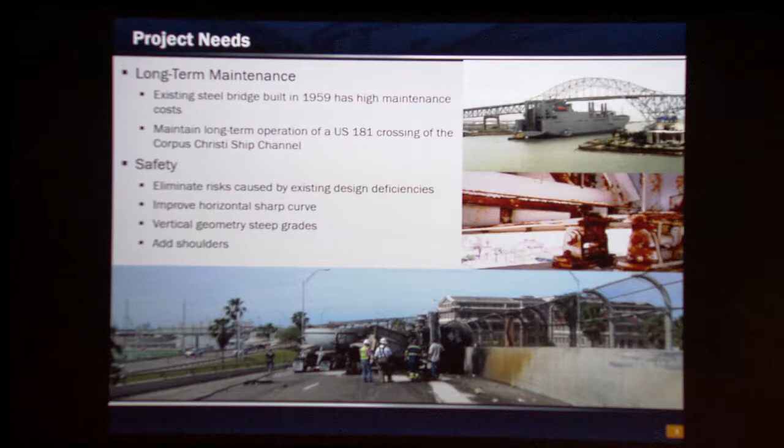Here is a picture of our existing bridge, and as you can see, it really makes the skyline of Corpus Christi. It's really an icon of the community. It appears on the city seal, it's on business cards, in restaurants, things like that. So our goal was, how do we recreate that? How do we get the community buy-in? How do we maintain and enhance the connectivity that the current bridge offered to the community?

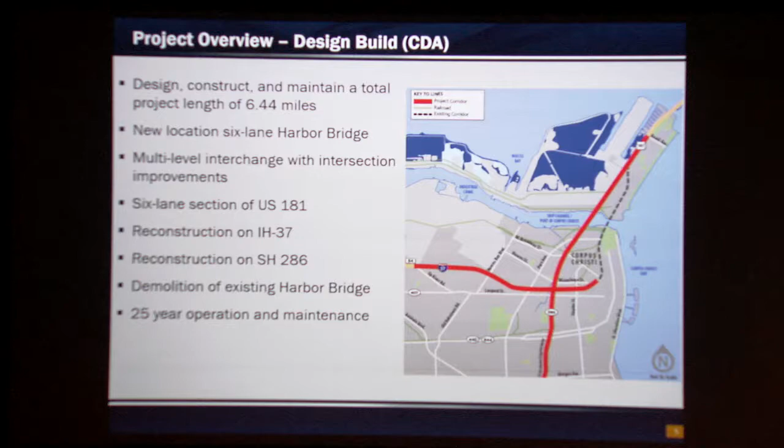Here's our scope. It is a design-build project with a 25-year O&M maintenance, so it's really a comprehensive development agreement, a CDA, and it's not really just a bridge. We're also rebuilding a major interchange. The interchange and conventional road work makes up 52% of the project, so the majority of the project really isn't just the bridge, that's just the pretty part we like to talk about. And then, of course, improve safety.

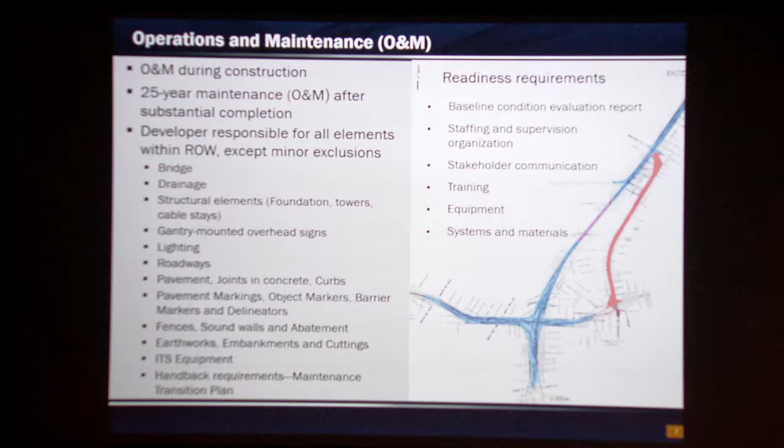The developer is currently taking over operation and maintenance of the corridor, which helps free up some of our maintenance guys, and they're really happy we've done that. DBI is the subcontractor that has taken over the corridor, and they've done a really good job, we're really happy with what they've done. There's a 25-year operation and maintenance period after construction. They'll be responsible for everything listed there. There will be performance criteria, and handback requirements, and somebody will probably talk to you about those in 2046. Hopefully it won't be me.

TxDOT can't deliver a project like this on our own. Our partner in this endeavor is Flatiron Dragados, composed of Flatiron Constructors and Dragados USA. The main bridge engineer is FIGG Bridge Engineers. They bring a lot of innovation and a lot of energy to the project, so we're really excited to have them on board.

So where are we? The RFQ was issued back in 2014. The CDA was executed in late 2015, and we are in construction now. We are still on schedule to deliver the project, with opening of the new bridge in 2020, demolition of the old bridge in 2021, and then living through the O&M period through 2046.

So how is the project managed? We are managed out of the district office. Chris Caron is our district engineer; he is our alternative delivery manager. Valente Olivarez is our deputy district engineer, but he also serves as the project manager on the project. I'm the deputy project manager. And then we have Christopher Amy, who is our environmental manager. He manages the day-to-day engineering and environmental aspects of the project.

He's also responsible for helping the developer get through any reevaluations that may be necessary. He also manages, as some of you may be aware, a voluntary relocation program that's part of this project, running in parallel with the construction project, but not part of it. So Chris manages that for us as well, and it's really voluntary. We've got two communities adjacent to the project, and we are helping them move out of the area if they volunteer to do so.

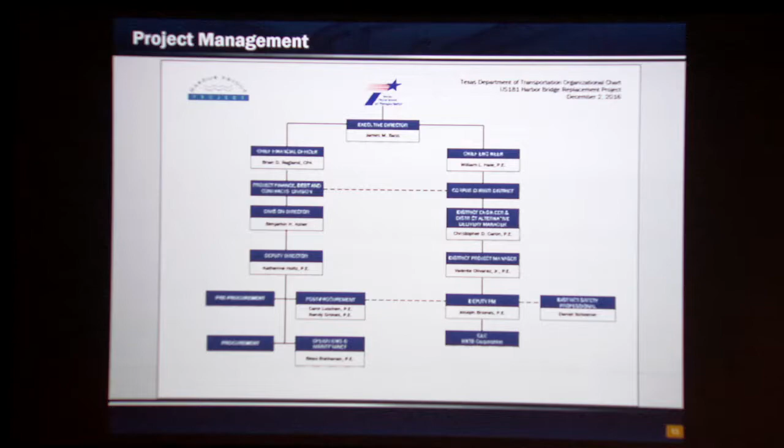I also want to say that the divisions really help us out. They act as SMEs for us, subject matter experts. They help us with our reviews and really do a good job of offering the district a lot of support. For day-to-day operations, we have a GEC, a general engineering consultant, that's HNTB, and they're down there with us every day working through the project as well.

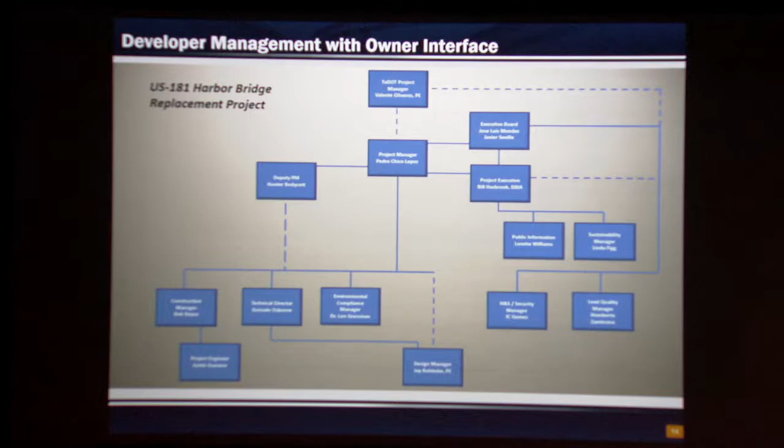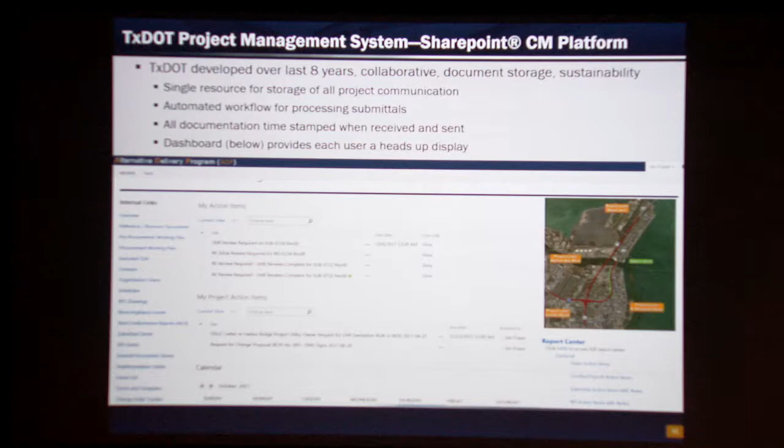One thing you can be sure of with any mega project is mega paperwork, so we use SharePoint to manage that. SharePoint is our central document control center. It handles design submittals, it handles all other kinds of submittals such as insurance and DBE things. It assigns workflows and reviews, it sets deadlines, and it's the official document control of the project.

The developer uses Aconex, and Aconex then uploads to SharePoint. This is their internal structure. For our field guys, we have the software called FieldWire. FieldWire has all the construction documents and real-time access for field personnel, so when they go to the work site, they can look at a footing and be sure they're looking at the right document and the latest construction documents.

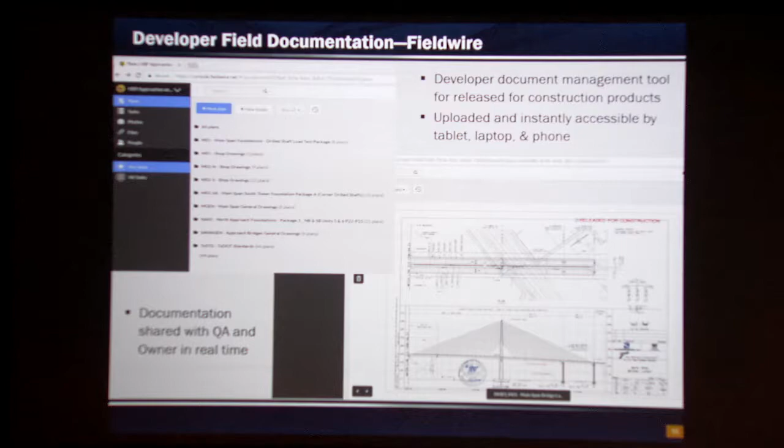So let's get into the contract a little bit and talk about some tools we have. We've talked about this in the past: non-compliance events. It's a unique tool that we have. The Harbor Bridge project is the first to use it in construction. It's really an administrative tool to achieve contract compliance, and we use it for all the small things that may or may not be as important to the developer as they are to us, such as DBE paperwork and insurance paperwork.

What it is, we assess points based on non-compliance, and the points add up. Each point is worth $6,000. Once they accrue to 10 points, they're assessed on the next draw or estimate, and they get hit with a $60,000 kind of LD. I do want to say we do not use it as punishment for the developers at all. The PM has ultimate discretion on how the tool is utilized, but we've had really good success getting a lot of paperwork stuff cleaned up utilizing this tool.

We participate in a lot of over-the-shoulder workshops and meetings with the developer, where we sit with them face-to-face. We put everything out on the table, and we try to get design submittals substantially complete and substantially in line with the technical provisions before they're officially submitted, so there's not this iteration back and forth. This really cuts down on the time it takes for a design submittal to be approved, and ultimately will hopefully result in a shorter project duration.

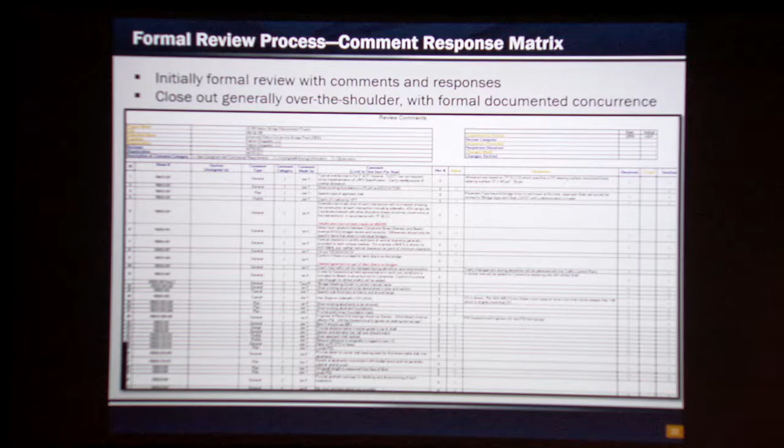Right now, we are averaging 6.6 days on returning a design submittal. Per contract, we're allowed 14 days for that review, so we're about half. Moving forward, through collaboration with the developer, we're looking to reduce that even further.

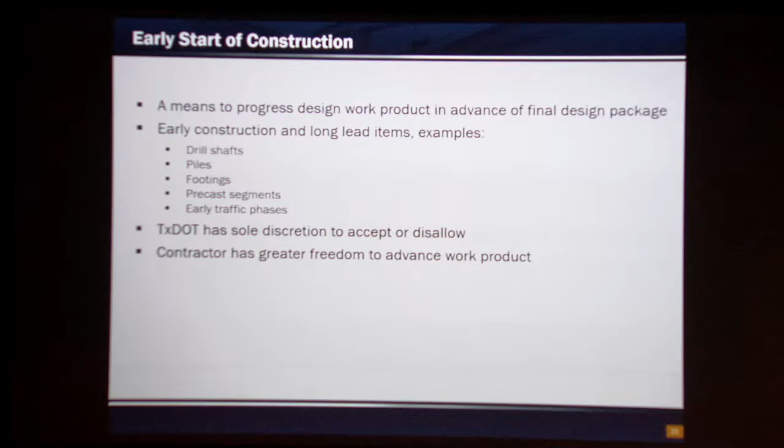So to get to construction, the developer really has two avenues. He's got an early start of construction avenue, which is for early activities, foundation designs, things that we're comfortable with their design assumptions on and that don't have a high risk to get out there and build kind of early. The second mode to get to construction is what we call our certificate of compliance. With a certificate of compliance, we're really comfortable that we have a true complete design, including calculations, right-of-ways cleared, utilities cleared, things like that.

With a certificate of compliance, TxDOT provides a written concurrence that we have looked at the design and we concur that it is substantially ready to go. That doesn't remove any of the risk from the developer. Our risk people are very clear to say that, so I have to say that here. But it does give the developer a little bit more confidence with their designs moving forward.

Another part of this project is public information. We made public information part of the contract, part of the developer's responsibilities. The developer is responsible for interacting with customer groups, media relations, social media, but mainly to maintain and build on TxDOT's reputation in the area. We really pride ourselves on our responsiveness to the public and to the media, and that's something we take big pride in and pay attention to moving forward.

Now some interesting things we like to brag about with our bridge. Our main span spans the entire waterway of the ship channel. It is 1,661 feet long, about 5.5 football fields. Once complete, it will be the longest concrete segmental cable-stayed bridge in North America.

Additionally, our main span towers sky to 528 feet. They are about 125 feet taller than the tallest structure in Corpus Christi, and they will be the tallest structures in Texas south of San Antonio. So those are some things we like to brag about.

Another thing the developer brought to the table with this project is a 170-year design life for the main span structure. It's been really neat trying to design how we're going to protect this bridge for a 170-year design life.

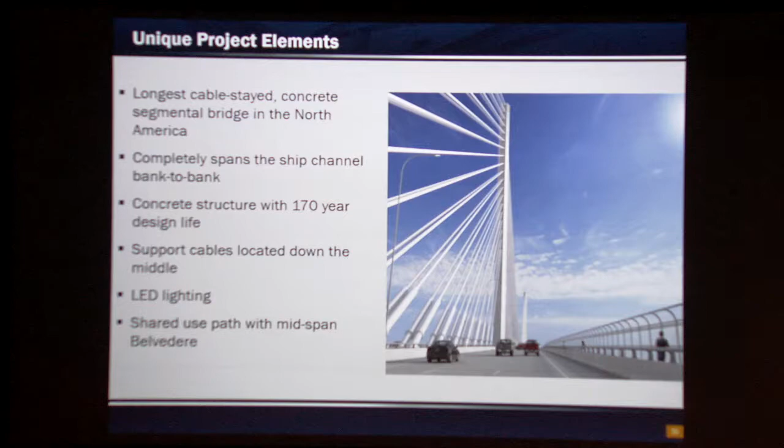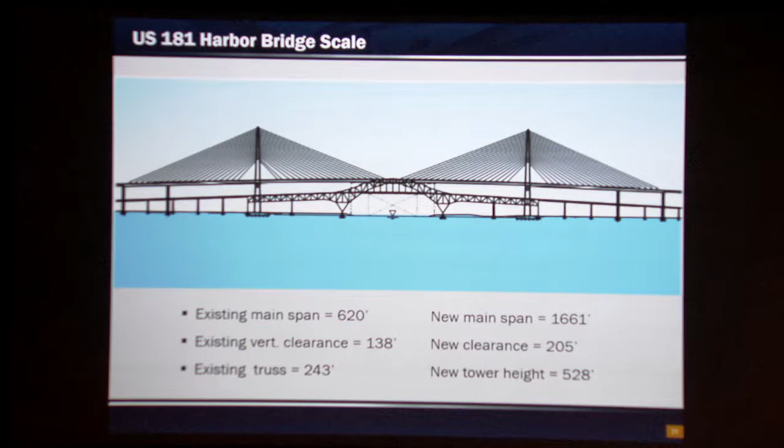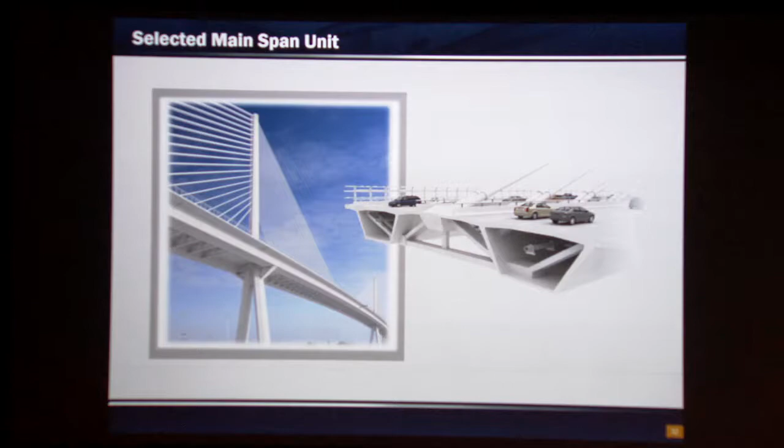Here's just an artist's rendition of our selected main span unit. I mentioned FIGG earlier—they really designed some sleek, elegant bridges here. The cable stays run down the middle. So this gives you an idea of how neat this project is.

Another important thing to Christopher Amy, our environmental manager, is sustainability. How can we reduce our carbon footprint while we move forward with the project? Partnering with Federal Highways, the developer has committed to an Invest Platinum rating during design, construction, operation and maintenance. So we look for any opportunity to be more environmentally friendly and reduce our impact. We'll be monitoring going forward and probably providing updates every year as we move toward achieving the platinum rating.

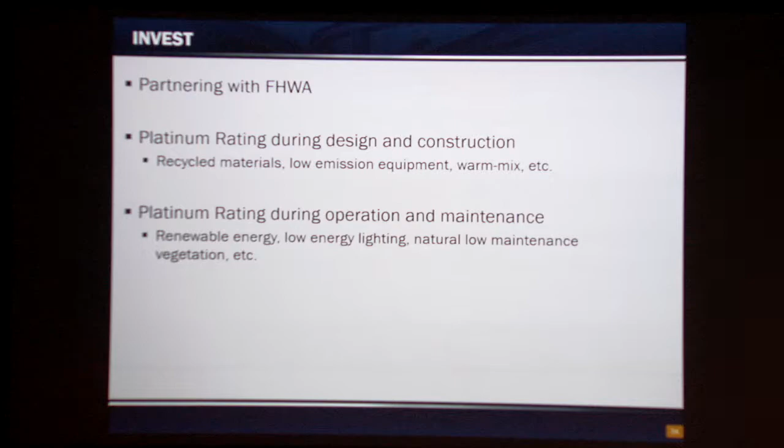As I mentioned earlier, the old bridge is an icon of the community, and the community has a lot of pride in that. So we said we need to involve the community, have them get some ownership and buy-in into the new project. We had two design charrettes where we invited the general public to comment on the aesthetic proposals and landscaping, and really gave them a vote on what they'd like to see. Through those design charrettes, they voted, and we came out with concepts we'll be moving forward with. What we also heard was the importance of connectivity.

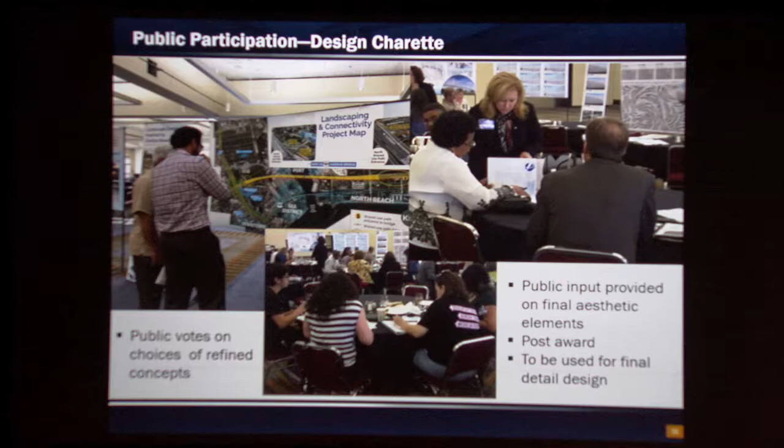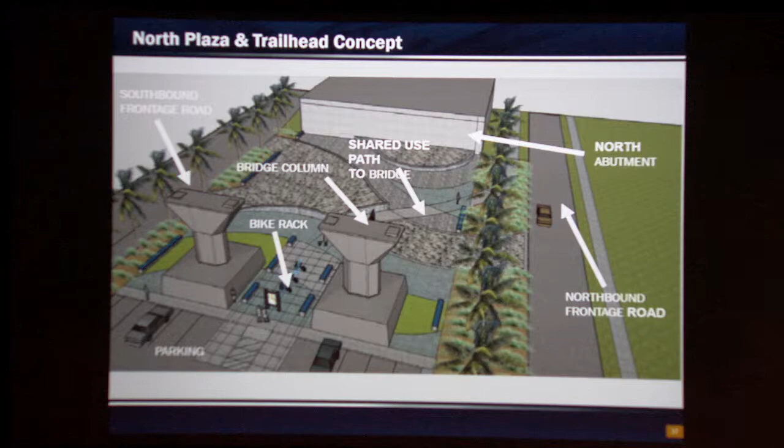How do we connect communities, across the bridge, under the bridge? We have a shared use path that I'll talk about in a second. Out of that came a shared use path across the bridge, and they said we need some connection points at the north and south. Here's a rendering of what we're planning at the north. The bridge is removed so you can see what's underneath. We plan on building a parking lot and an ADA accessible pathway to our shared use path so everyone has a place to access our facility and is encouraged to come look at our bridge.

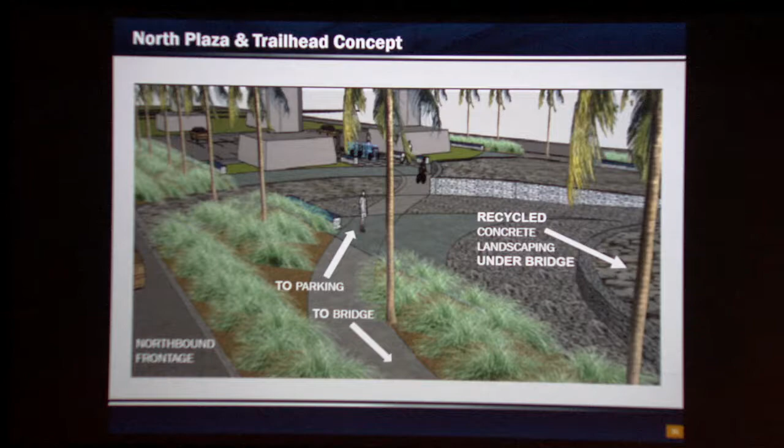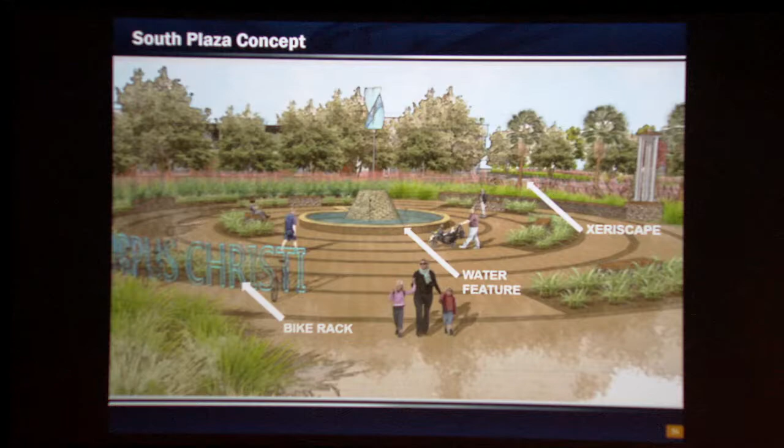Here's another rendering with some sustainability features, like recycled concrete. On the south side we have a little more real estate than on our north side, which is our North Beach area. For the south side, this plaza concept was discussed, along with a trailhead for the shared use path. We're still working on the south side to optimize the design to make it user-friendly and as attractive as possible.

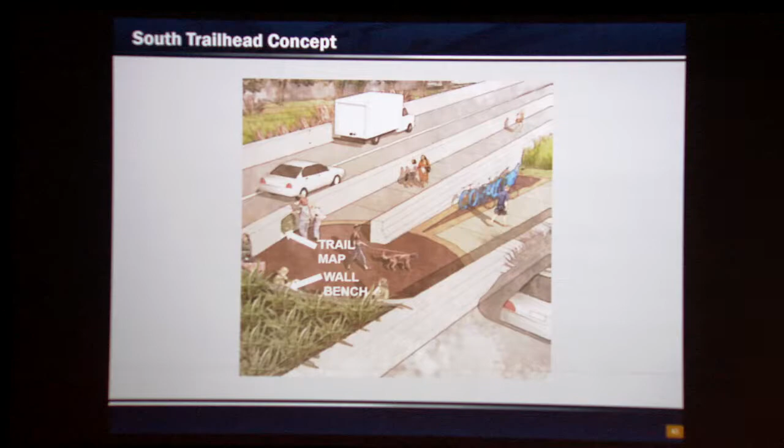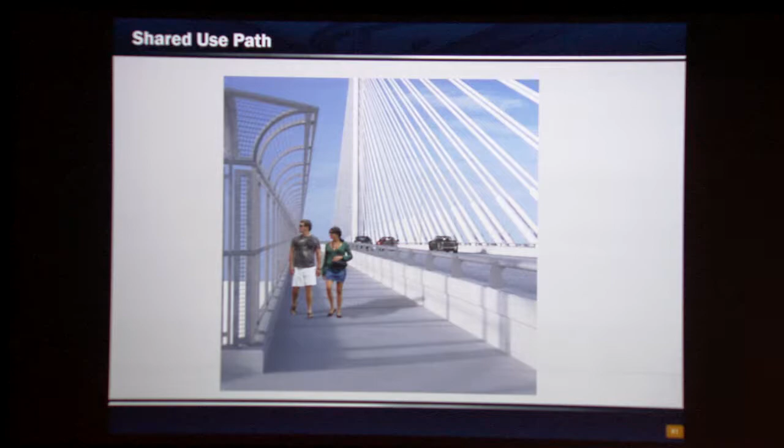Our shared use path is a 10-foot wide path that traverses the entire bridge. It has a pedestrian fence on one side, and a positive barrier to protect pedestrians from the traveling public on the other side. It will run 2.4 miles one way, so a round trip would be 4.8 miles. But there will be a belvedere in the middle for you to rest your legs if needed.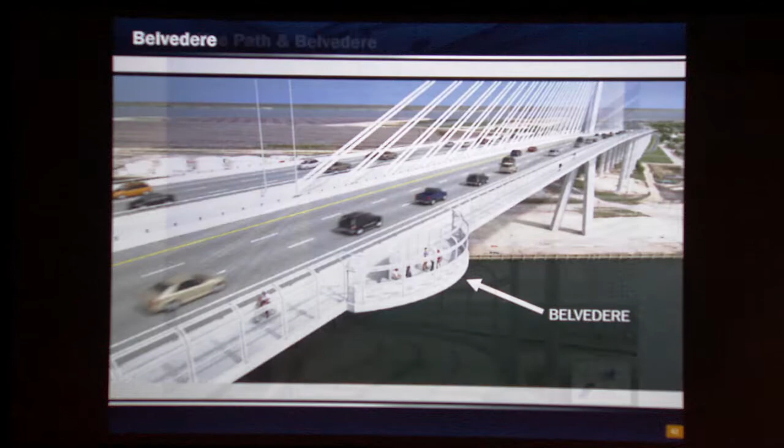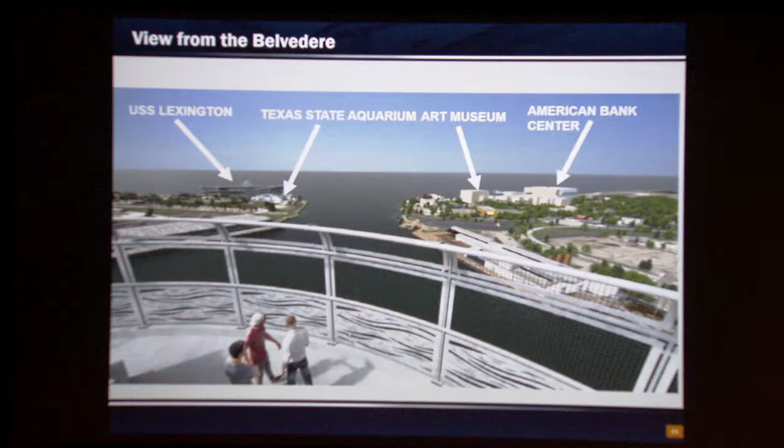The belvedere in the middle is really a lookout. Here's another look at it, giving you a great view of the bay and the downtown attractions—the USS Lexington, the Texas State Aquarium. You'll be able to stand up there and watch the shrimp boats working, so it's going to be really neat once it's built.

And then, of course, the landscaping. What we heard from the community was they wanted something natural to the area—nothing fancy that didn't mimic our natural beauty in South Texas. So that's what we plan on doing moving forward with the landscaping.

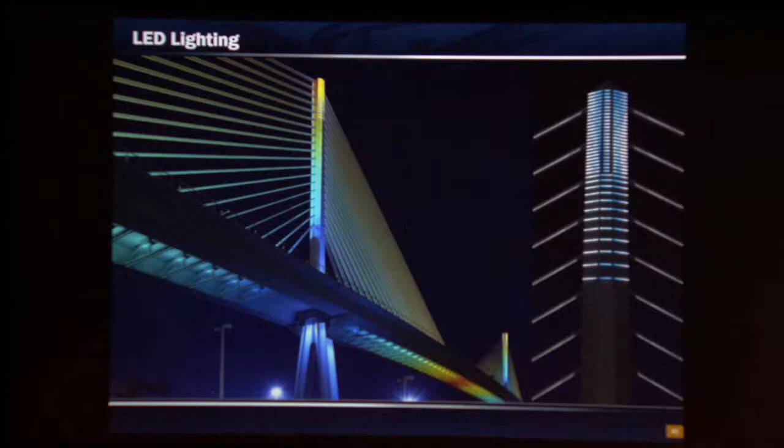The first question we always get from community members in Corpus Christi is, will there be lights on the bridge? Our current bridge has lights that dance through the night sky—it's really neat. So our answer is yes. It will have LED lights throughout and under the structure. The programming will allow near limitless combinations, customizable for events and holidays. We're really excited about that.

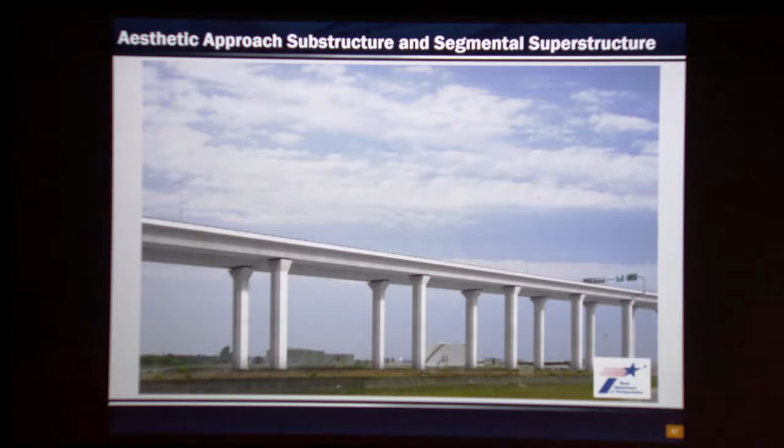Here is an artist's rendering of our approach structures. The approach structures match the main span segments. Again, FIGG brought this to the table—it's really sleek, really elegant. It provides continuous visual lines and planes, and it's just a really sharp looking bridge.

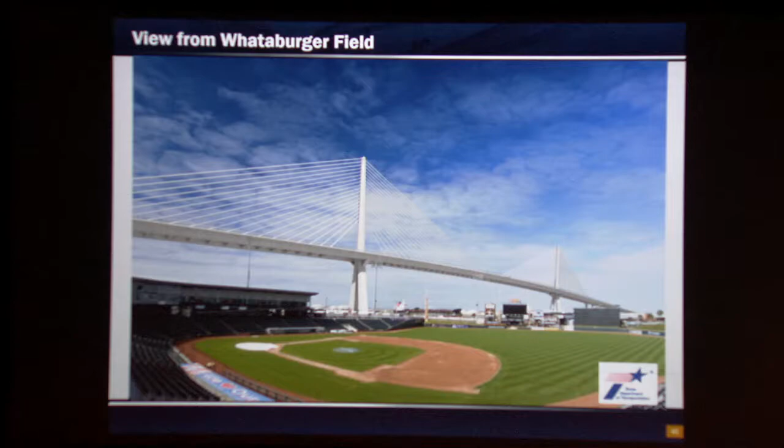Here's a rendition of the bridge from Whataburger Field. We have a farm team from the Astros, the Corpus Christi Hooks, and they have a really nice field down there. The old bridge was where you could see it from left field. Now you'll be able to see the new bridge from right field. So hopefully season ticket holders didn't commit too long to seeing the bridge behind them.

So construction, as I promised, yes, we have started, and yes, we're really excited, and it's really getting busy down in Corpus Christi. In addition to our construction sites, the developer has four sites that we work out of. We have a segment yard in Robstown, about 15 miles to the west of us. We have a concrete batch plant towards the center of Corpus Christi, a downtown office, and a field office near our port that doubles as a warehouse as well.

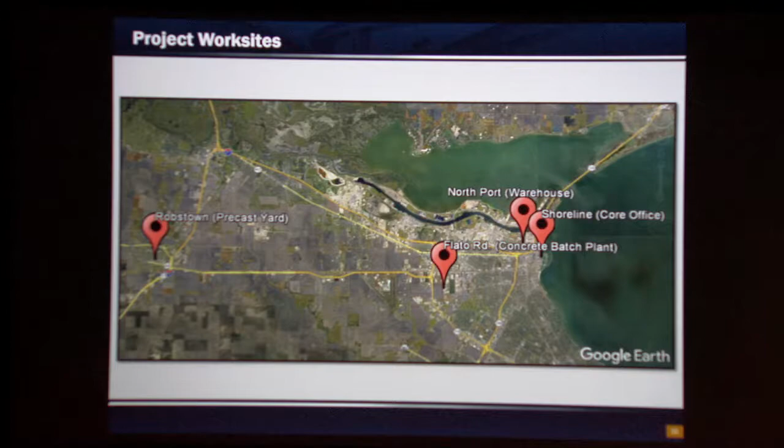Our concrete batch plant - as I mentioned, the project is 52% conventional roadway, so that's going to be a lot of conventional bridges, a lot of sidewalks, a lot of curb and gutter. The current production capacity in the area just wasn't there, so the developer brought in their own batch plant. They will be batching their own concrete in-house out of this plant and deliver it to the project as necessary.

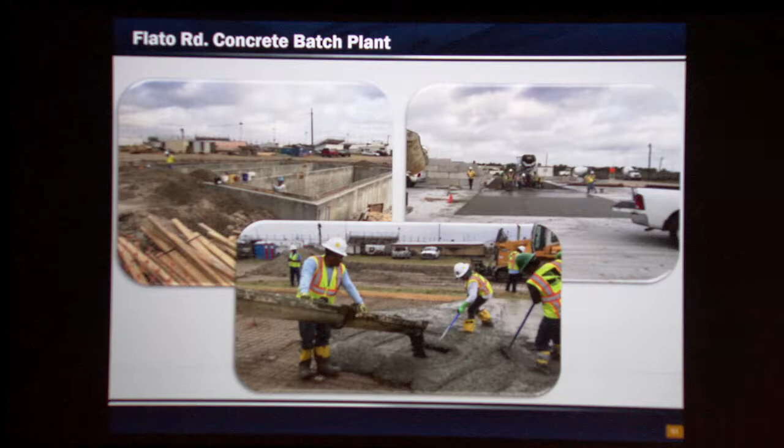The Robstown Casting Yard - this is where most of the activity is happening right now. You saw the approach structures and the main span structures. To get those structures up, they are going to have to cast nearly 2,600 segments.

These segments range in weight from 86 to 182 tons. Put that in perspective - we were thinking about this the other day at our public information meeting, wondering what a segment weighs. The thing we found that was very close was a blue whale. So one of these segments weighs about as much as a blue whale. Not only is it a really sleek and elegant bridge, it's a really heavy bridge.

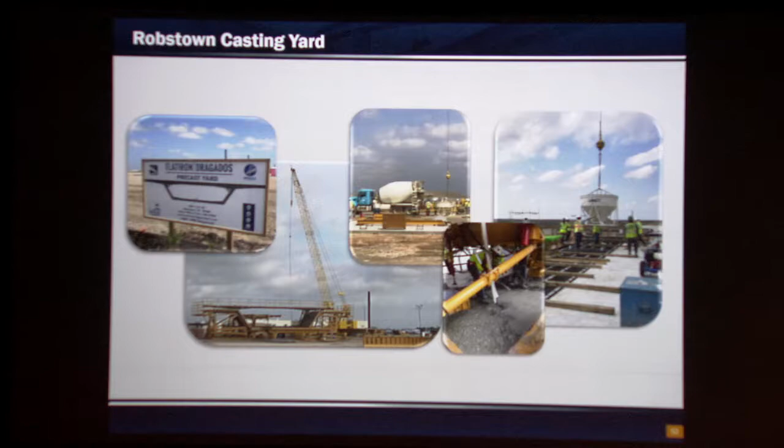The Robstown Casting Yard is 64 acres. More than half of it will be utilized for storage of these segments.

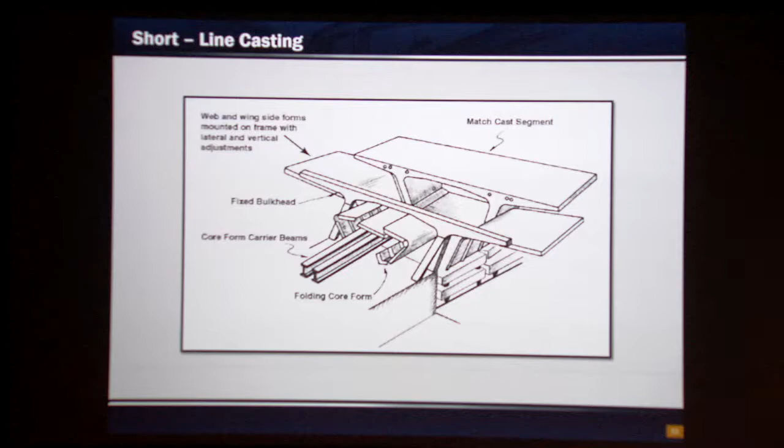They are match casting these segments. As they're produced, they cast a segment, move it forward after it dries, and cast the next segment right next to it, using the segment cast before it as a form. This ensures connection compatibility between the two segments. And of course, they put a bond breaker so they don't stick to each other.

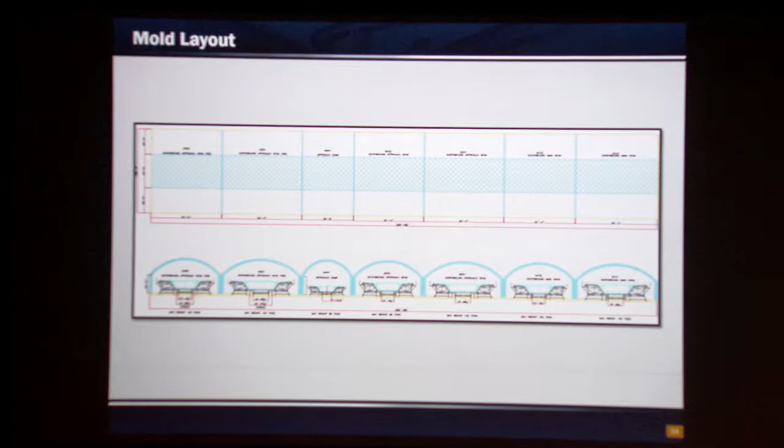Ultimately, the developer will have 7 casting beds producing 1 segment a day - that's their plan. We have 3 operational right now. What you see here are their survey towers. There are H piles driven into the ground, and a concrete column is cast around them, holding their survey gear on top for geometric control of these segments, so they can adjust if they make any mistakes moving forward.

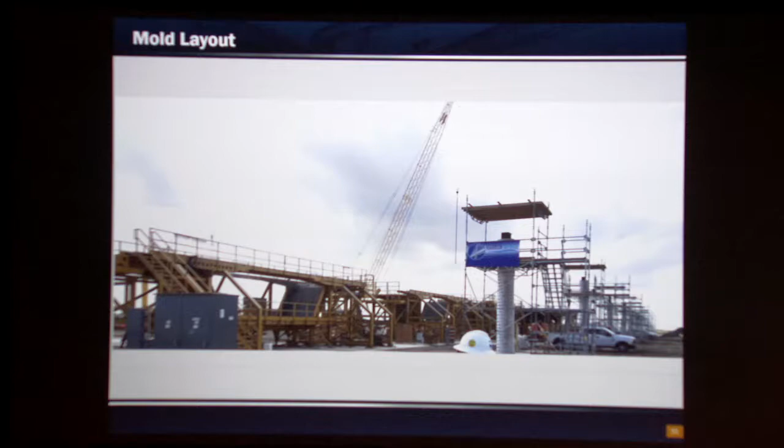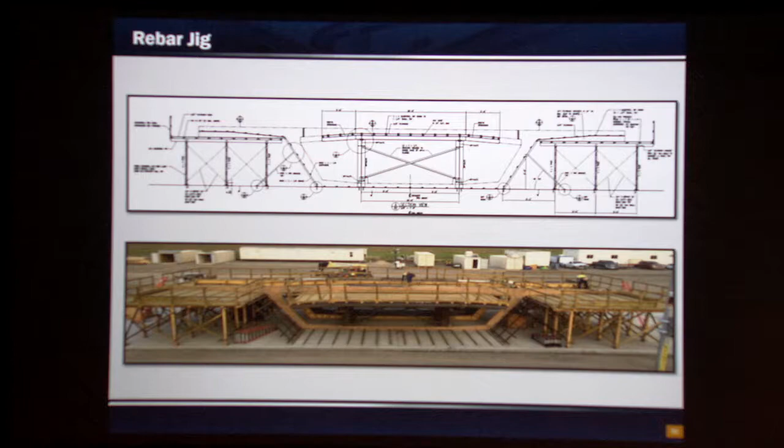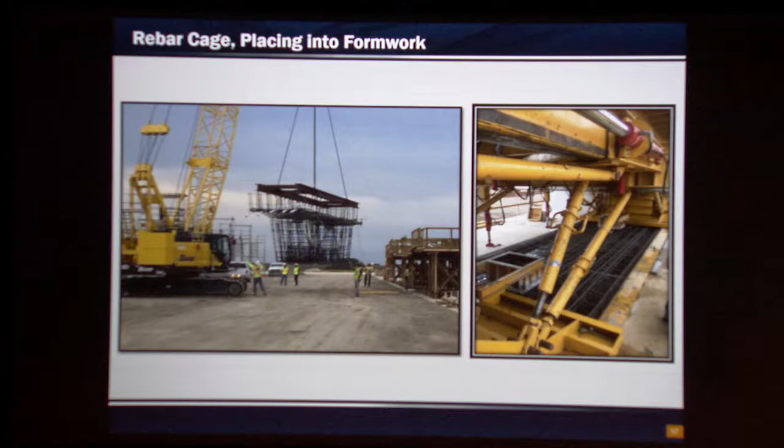This is a picture of the plywood platform, which we call our rebar jig. The rebar is completely tied away from our molds on these platforms, and then it is literally picked up and flown into the mold. This is really neat to see - you can see the people here, really tiny compared to the structures we're dealing with.

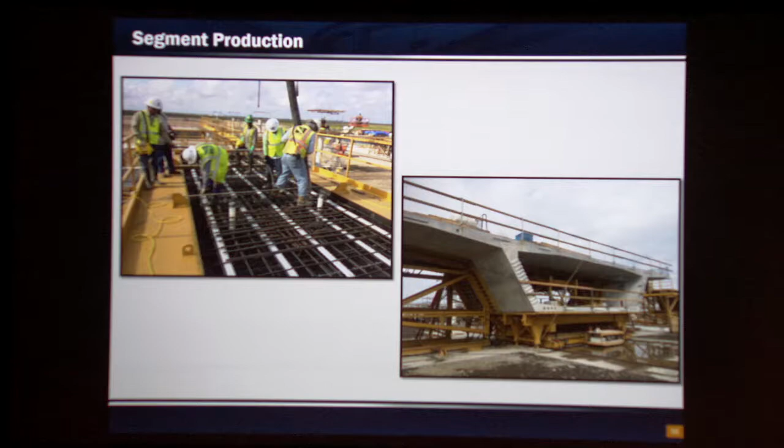This is a picture of our folks getting ready to place concrete in one of the segments. And it's not just rebar - you can see there's some post-tensioning ducts there, so there's a lot of post-tensioning that goes into these segments as well. While it looks like a big block of concrete, there's really a lot of sophisticated work that goes into these things.

Here's just another picture of our segment production line. These segments have been extracted from their molds.

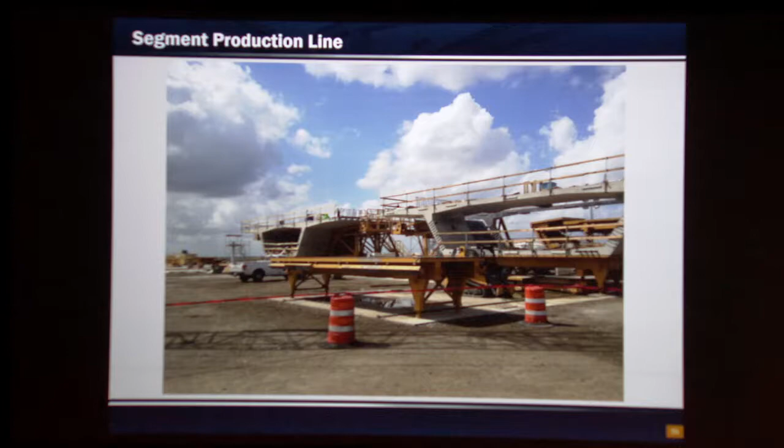This is something that really caught our eye. We were visiting the precast yard and saw this thing get delivered in about 1,000 little pieces. It looked like somebody had literally gotten a Lego box and poured it out, but it was gigantic. The next week we show up and it's put together - big kids with big Legos, and that's basically what this is.

You can see there is no one in that cab. The guy literally has a remote control, and he's driving this thing around the yard with a remote control. So those gamers out there, those kids at heart, we still get to have fun, even though we're building a billion-dollar project.

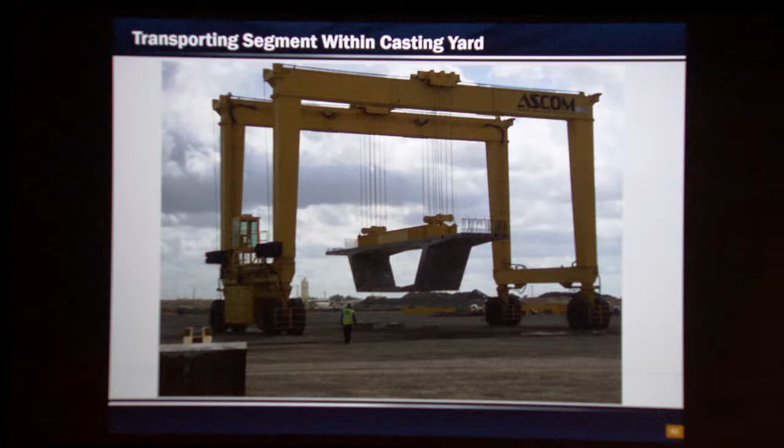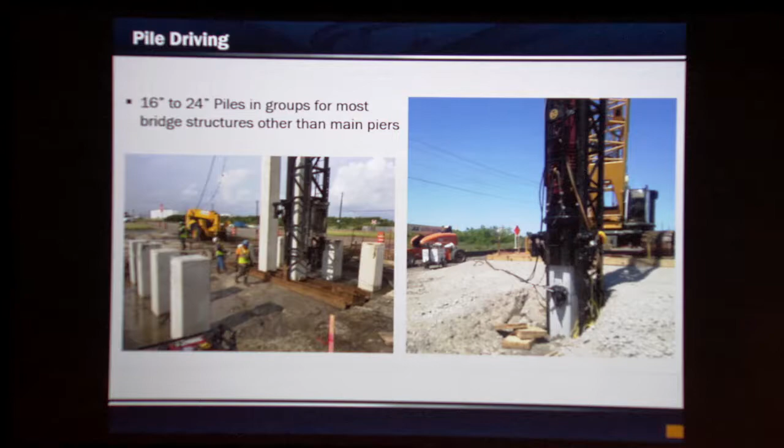Pile driving - 52% of the project is conventional, so we have a lot of conventional bridges to build, and a lot of pile to drive. For the next 3 or 4 years, if you go into Corpus Christi, you'll probably feel the ground thumping. Most of the structures are pile-driven foundations. We have a couple that, because of geometric constraints and adjacent property issues, require drill shaft foundations. But for the most part, we're driving a lot of pile.

We are also placing a lot of cofferdams, and this work is ongoing as well. Being on the coast, in some of these locations we hit the water table at 1 to 2 foot below our grade. So for our foundations, for our pile caps, we're using a lot of cofferdams.

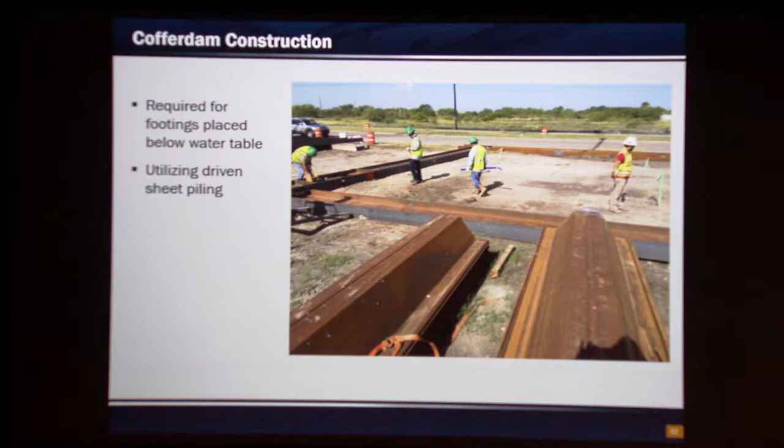The last major milestone I want to talk about in construction is our main pier drill shafts. These pictures really don't do it justice. If you guys get some time to come visit us in Corpus Christi, we'd like you to come see these things. They are 10 foot in diameter - just gigantic holes in the ground. They are 210 foot deep, and they take 650 cubic yards of concrete. The last concrete pour took us about 12 hours to place all the concrete. It's a huge production.

This picture on the far left shows a rebar cage being stood up. We were out there when they were standing that cage up, and you look at the top of the crane, and the rebar cage extends to the top of the crane, and you just say, wow, that's really, really big. The guy next to us nudges us and says, that's only half the cage. So these structures are really, really big.

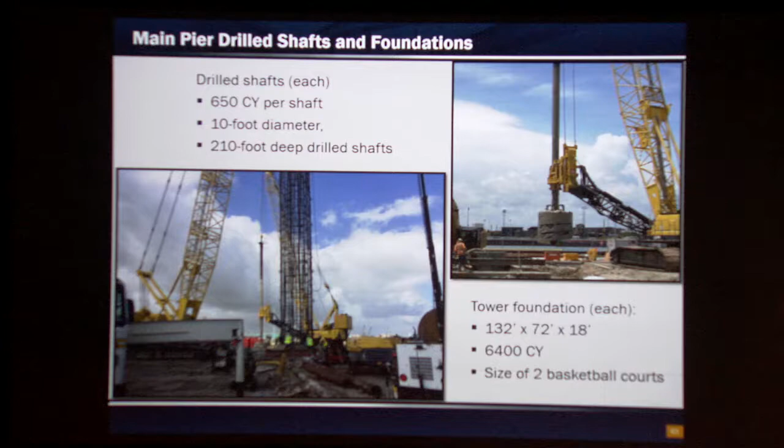In Corpus Christi, a district like ours is really proud and fortunate to have a project like this, to be involved in a project like this and to help deliver it for TxDOT and for the state of Texas. For that, we thank everyone involved with the project for this opportunity. That's all I have talking-wise.

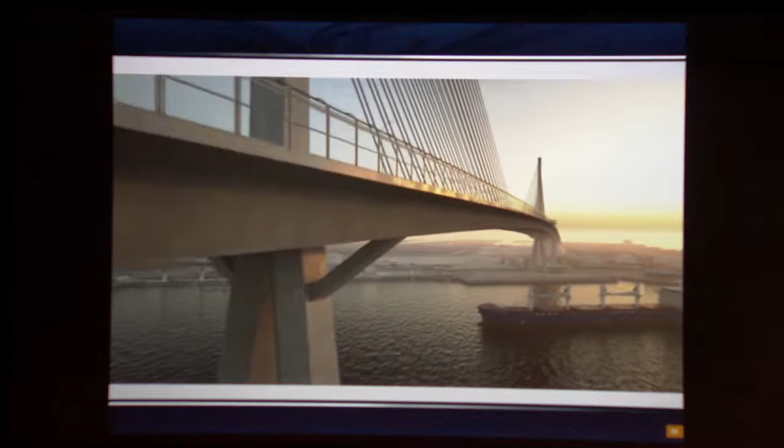Yes, sir. Not on this structure. The structure has been modeled in the wind tunnels as designed, so there will not be - with this structure, with this project, we don't foresee any expansion opportunities. Not saying that in the future it can't be retrofitted for something, but it's not part of this project.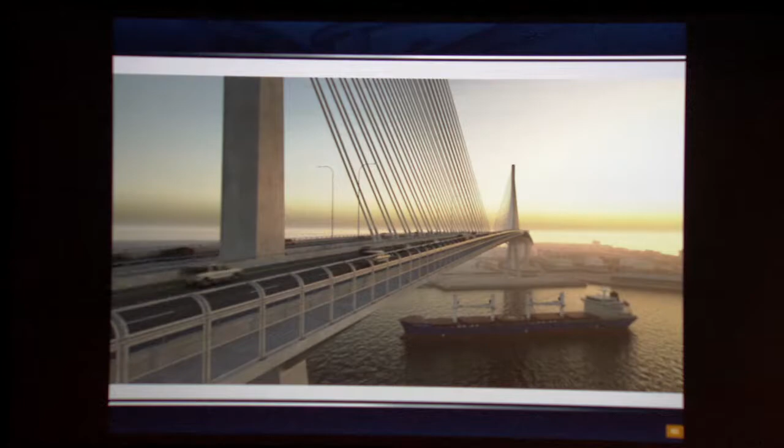Yes, sir. 2020 for the new bridge to be open. We got a lot of work to do.

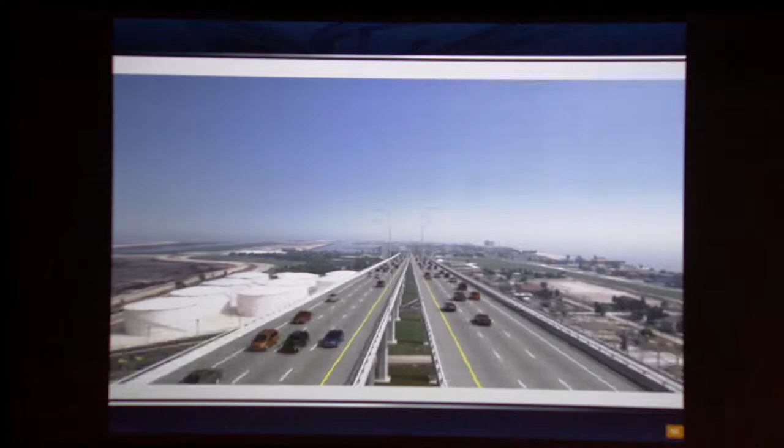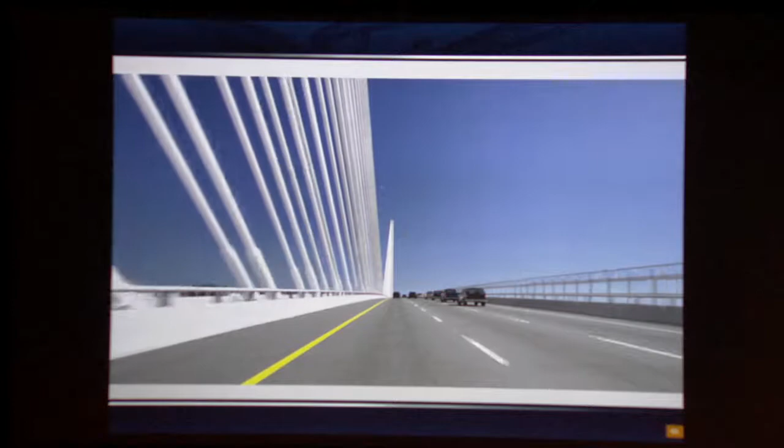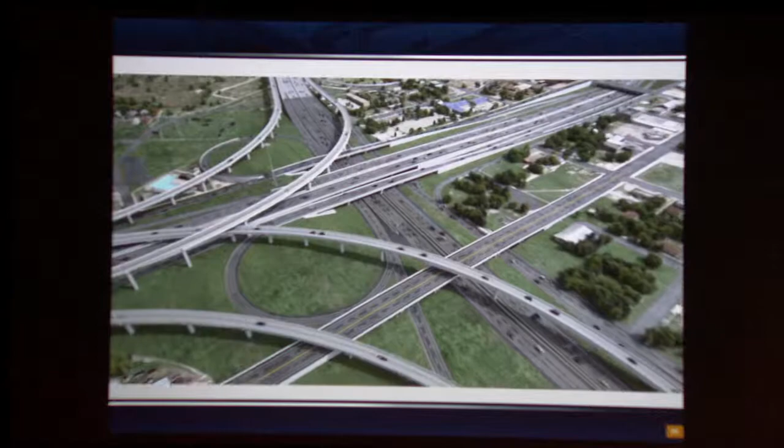Yes, sir. The port had a lot of input in the beginning of the project through procurement and that kind of stuff. The question was, did the port have input in the project and the economic impact that it's going to have to them? And yes, they are a partner in the project, so they did have input through the development of the schematic and the ultimate design.

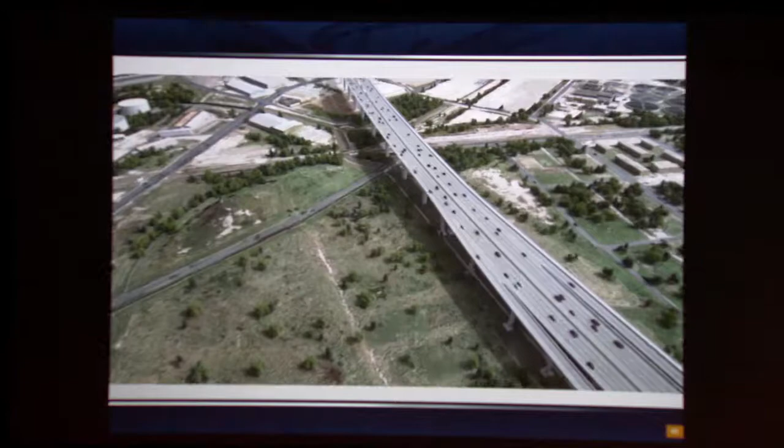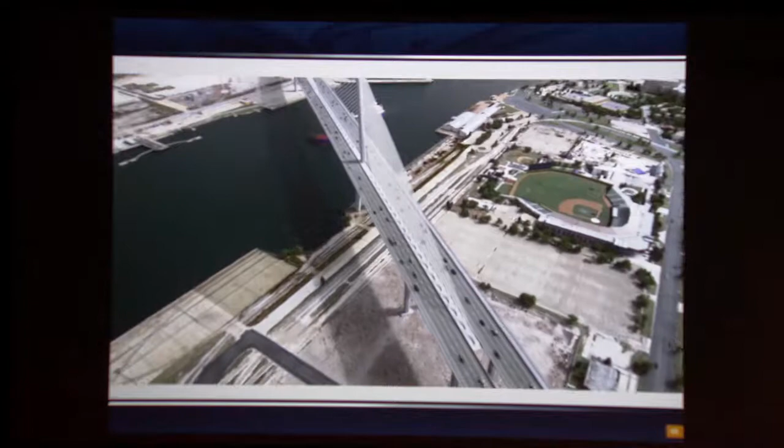Yes, sir. The question was, does the 2020 date include the interchange? And yes, it does.

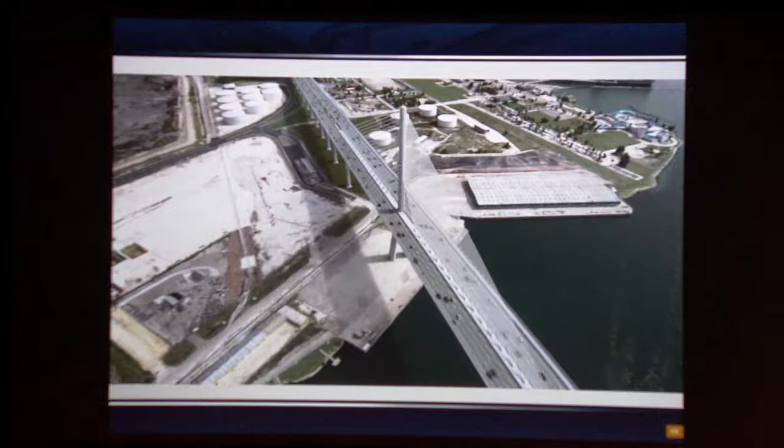The question was, is there any communications run through the bridge? There's a whole section in the technical provisions for ITS requirements, and there will be communications across the bridge for the state ITS infrastructure, yes. All right, thank y'all.